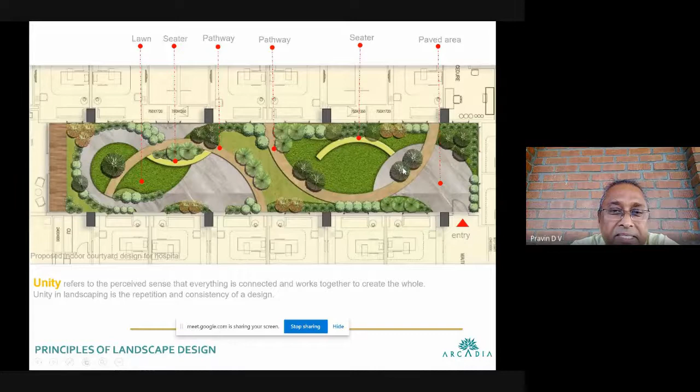This is one of our projects, which I'll discuss a little later.

Here we're talking about balance when you're doing a design, how you do an axis, keep all your vistas, planar vistas, see your building structure and what are the views from inside and outside, then create your whole system based on that.

So this is how we did one. We did this axis line when we come in, and then a little balance here. You have this circle, then this, and they both blend into each other in some aspects, with a few elements thrown in to compose the whole thing.

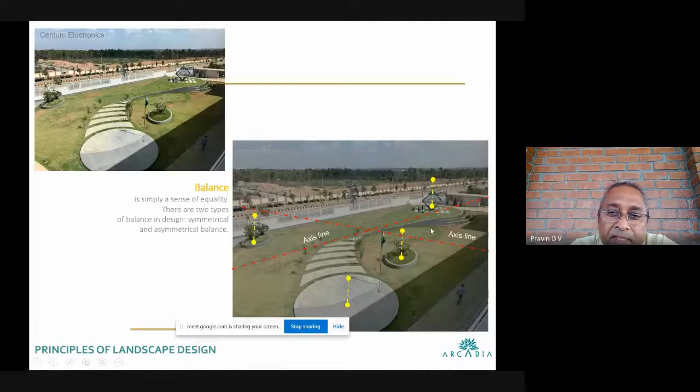So these are all the basic design fundamentals, which I'm just going through once, then we'll get into the details. This one is all about proportion, like in terms of scale, the heights of these little kerbs, the height of these walls. The idea is to keep everything nice and cozy, depending on the scale.

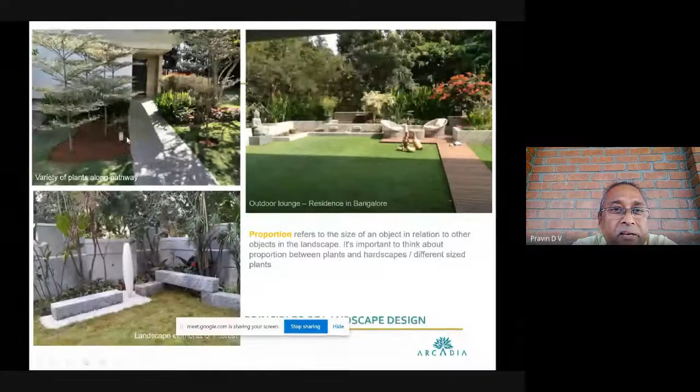Even here, for example, for this axis we have low trees, and being the pathway narrow, the trees are planted accordingly in a low scale. Whereas here you see these are much bigger. This is actually on the first floor, a created garden on a portico, which is the same level as the living room of the house.

And these are some more experiments which we have done using stone as seaters and all that. The whole idea is to get these proportions right. For example, here we have given this height, around 18 inches, whereas this is much lower, so kids can sit, even elders can sit. That was the idea of doing this in different levels.

So I'll go to one of these projects, which is a huge site, around 6 acres with one house in the middle. Then they have this pool. The idea was that you enter, walk into your living room, and when you sit there you can look across the pool into this space, which is actually a gazebo, and then onto a green wall. Apart from all the green, there's some more green here as a backdrop for this structure.

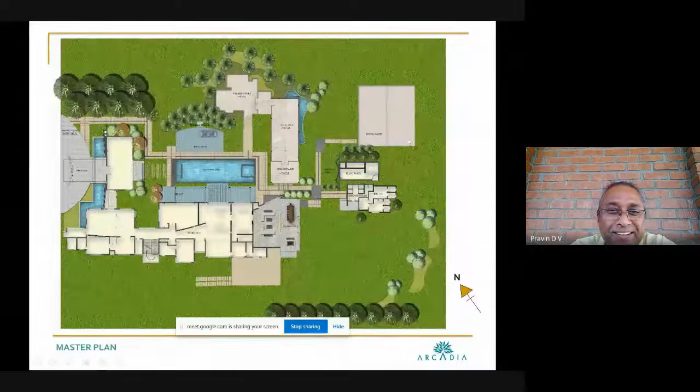So this is how we worked this whole plan out, I'll show you how it looks. When we first got into this place, this was what was there, we had this little gazebo. This view is from the living room, when you come in and look out over the pool, you see this gazebo.

Then we changed it to this. We did something more modern here, the pool remains the same, and then we put this structure here. It's like a gazebo which extends into this, what we call the party hall for a minute. And then this wall here, I'll show you some more pictures.

We have a greenhouse. Similarly, on the house, the facade was quite blank, so we added these structures, landscape elements, to make the whole space nice. The idea was that from inside, when you step out, you have some shade, some open space, some plants, and the whole space overlooks the pool.

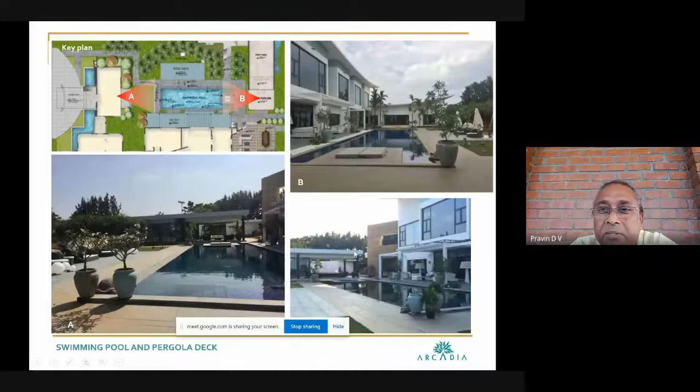We walk in here, step out, and then we see the whole pool and the gazebo here. So now you see here, this is the green wall which we have done, and this is the party hall with that gazebo-ish roof, after it's all done up. Similarly here you can see the structure. The idea was that this whole thing blends together into a nice space.

When you come out from this party hall, these are the steps to come to a sunken court. The idea was that the landscape is higher and you are at a little sunken level, so when you sit, you actually feel like you're sitting in the middle of a green. This is just behind, the sunken court.

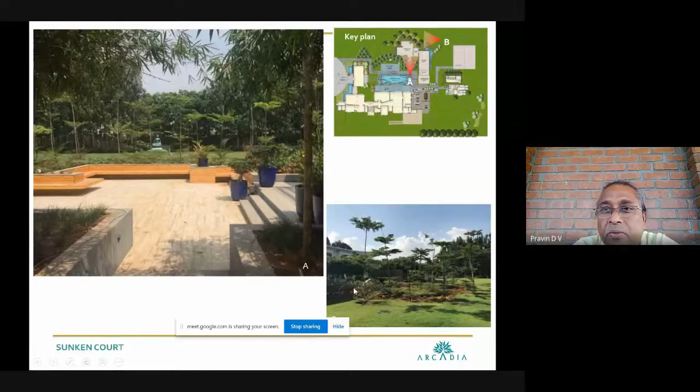The idea is when you sit, you have all these plants literally falling over, so it gives you a nice feel when you're sitting there. And then, being Bangalore, we put this little fireplace outside, so when December and all the parties are happening, this is a nice space to hang out.

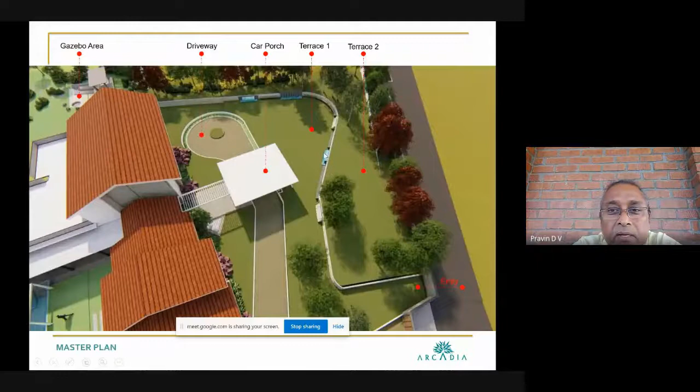I was talking about this retaining wall. A lot of engineering goes in terms of the volume of water coming in here and stagnating below, putting pressure on this wall. The wall could fall, so there's some engineering involved where we have this large foundation retaining wall, which is tapered because we wanted to put in a seater here.

And then we created little slits here. Apart from that, we use something called a drain cell, which takes the pressure of the soil off the retaining wall. The idea is the water pressure continuously on this is not a good idea, so we let the water drain out through this gap, collect into a pipe and out again.

These are the overall levels for how we did this. This is a driveway level - we have the first level, then the second level, then the third level. That's how we reach the 18 feet, creating these large open spaces in front of the house.

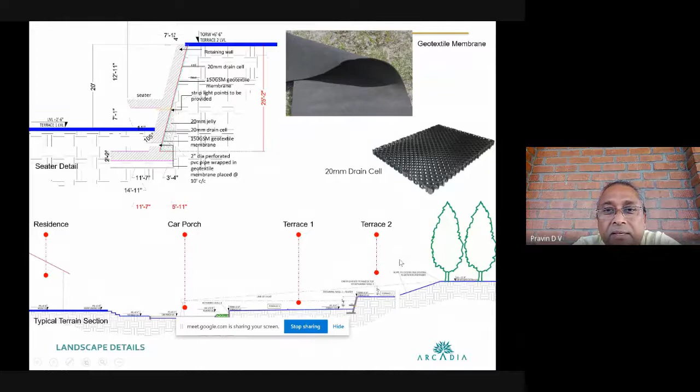Yeah, this is how it is - we come down, then flat, and then again the larger part. This is how we're detailing this space out. So these are all work in progress, kind of drawings we do to sell this concept to the client first.

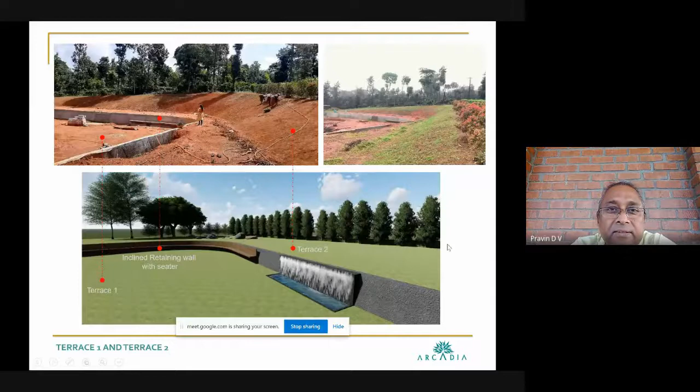So this curved retaining wall is in RCC. Here you can see the height, it's quite steep. This itself is 5 feet, so you can imagine how much this is.

So the idea is, at some point we do the seaters - this is how we had planned it. That's why you're given that incline in this wall, to have the seater.

So these are some images of the driveway and things like that. So here the idea is, when we work on the landscape, we start - whatever is outside the house is a part of the landscape. So we talk about what you are going to see, what kind of views we are going to create. Apart from that, when we drive in, what is the experience which you want to create?

Start from there, and then we come back to the material - what kind of material, what is this material, the whole thing. And then again we try to tie it up with the building material. If you have some cladding on the walls, try to tie that up with this material, so it kind of blends in. Otherwise you have this completely contrasting element, which is also nice depending on the scenario.

So this is how we've done the entrance. What is interesting is from this point to this point is almost 18 feet again. So we said let's do this whole thing in wooden strips like this, which have got little levels in them where we can put in the lights, and the top is glass.

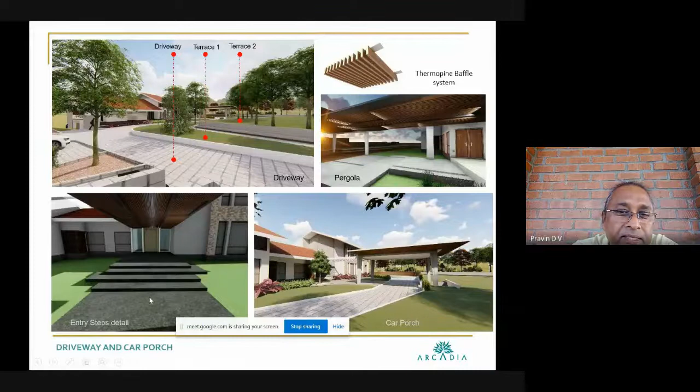Now we're going to create another deck here. And then these trees, what we had planted earlier, we are using it, like you can see it here. We can put a large gazebo here, so this becomes like a pool bar come seating area. Then you have these trees going through the roof, so we work the roof around the trees here.

And this is like an overflow pool - it's, what do you call it, an infinite edge pool. That's what we call it. So this is how it's detailed out.

You have the pool deck level here, then the water level at the same level, and then here there's a drain which goes down, which you don't get to see when you're standing here. That's how these infinite edge pools are designed. You can see them here.

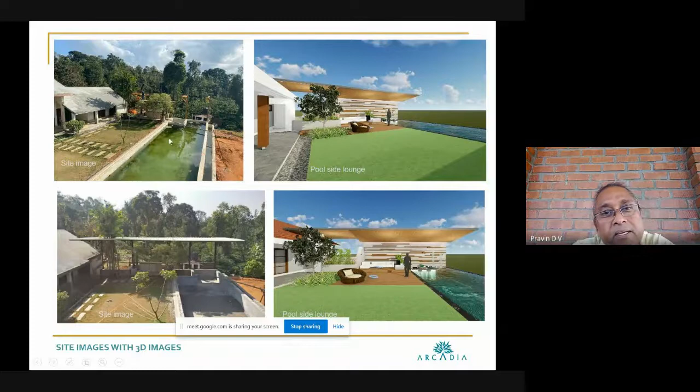Yeah, the same shots from another angle. So this is the pool bar with some waterfall, some wooden underdeck ceiling. This is how the structure was done last month.

This is also another large area. Like when you enter from the main door, you come in here, and this is like a massive space, which is like the den, which again overlooks the pool and things like that.

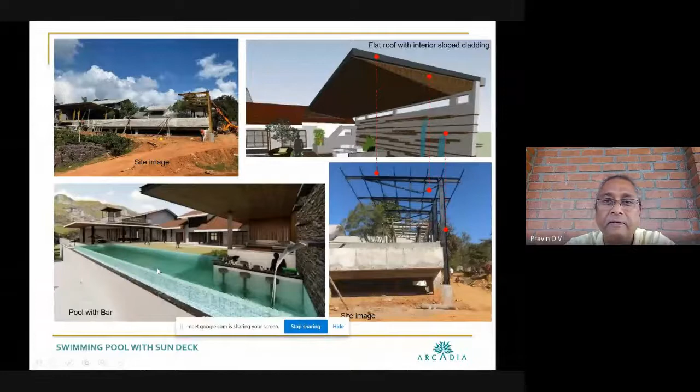So now that we have these huge spaces, we decided let's do something interesting on top. So here we have these levels, they're all done in wood. The idea is that you sit here, and then from there you can still overlook onto the pool here.

Apart from that, the view is fabulous. So we created the best in terms of creating these seaters here. And this is a master bedroom here.

So you step out here, and then you have these seaters at different levels, plants. And then this whole thing is a glass railing - the idea was you get to see the max amount of visibility in the estate.

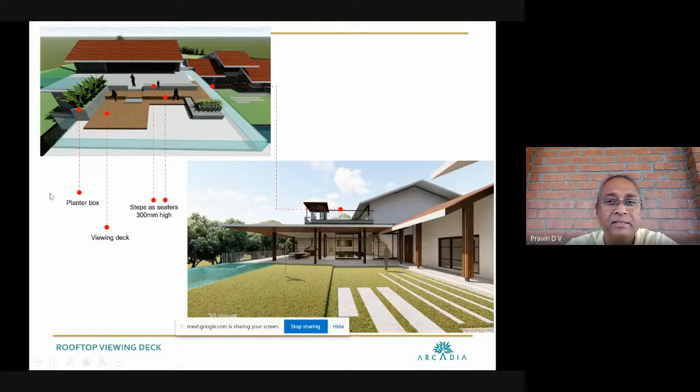This is the other angle.

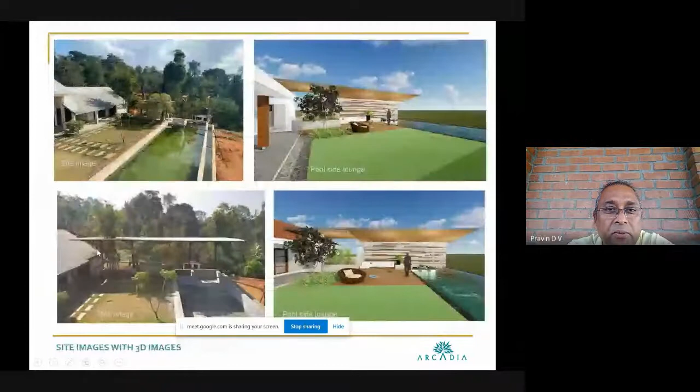Our landscape design starts from the gate, and then you plan out: if you have a visitor, what are they going to do? They get off here, go and park, then come into the house, enter the house, then the bedrooms are here, etc.

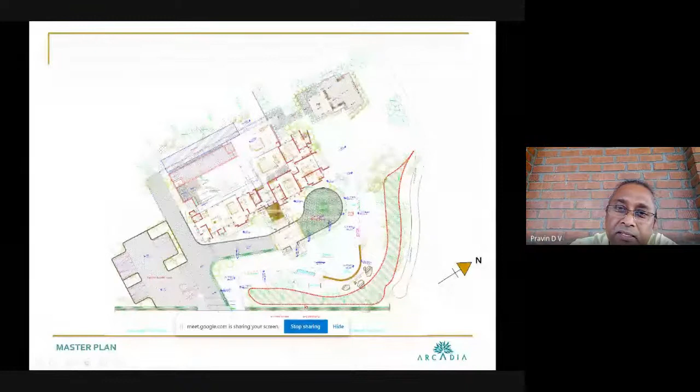So the hangout spaces - this is the den we were talking about. This is the living room, and this is the den, which is a bar, seaters and all, overlooking into the estate here.

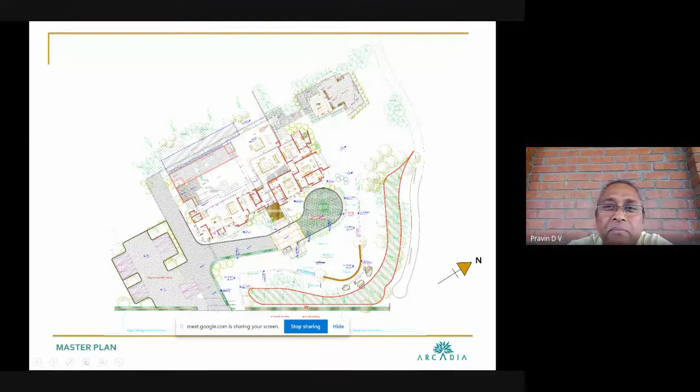From here we have steps going down into this little gazebo, a yoga deck we call it, and a movie theater is what we're thinking of, an outdoor movie theater. There's something we thought would be interesting in that space - I'll show you how it works.

From the house you come out here - this is the yoga deck. Then you come down here, and this is again a sunken seater, very similar to the first project I had shown you. You can see it here - you come out from the house, and then you have this yoga deck, sunken seater.

The idea was to do a movie setup that would be fabulous when you're out in the open at night under dark skies, with a screen where you could watch something nice. This is the screen how we proposed it - the projector is here, which throws the image here, and the speakers are behind. That's how we looked at it.

This becomes a seating place - you can add in some more chairs, and this is a little fireplace here. That's how we did this. The roof has got an interesting wooden profile shape and all that.

This roof - what we're thinking of doing is not using RCC, because we wanted a flat roof, since the whole house has got too many slopes already. So we thought, let's do a flat roof.

When you do a flat roof, the simplest material is RCC, but we decided let's do it in granite instead. We'll take these huge chunky slabs and fix them on top, creating this whole flat roof in granite - zero maintenance, and it looks more natural.

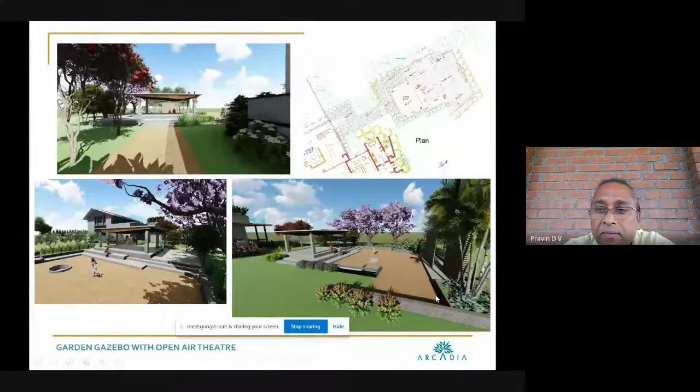Just to show you the detail - since the smaller the site, the more challenging it gets, because we try to make it look more interesting, and you have to consider each experience. The moment you open the gate, this should look good. So this is what we did.

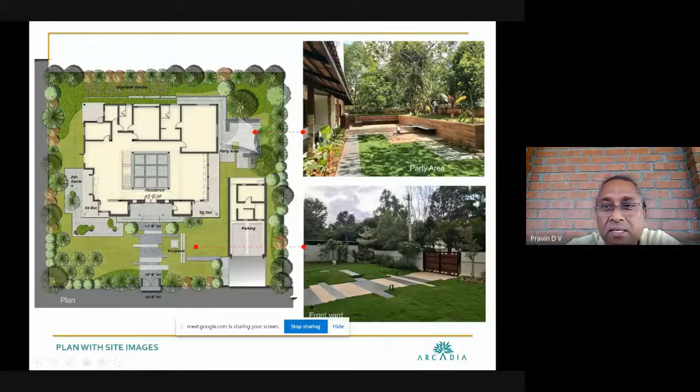This pathway holds the plants on one side and the plant and lawn on the other side. Here also this level was much higher, so we created this little space with seaters. So when you step out here, this is a nice cozy space where the trees are tall - it's a more overwhelming space, feeling like a nice sunken low seating area.

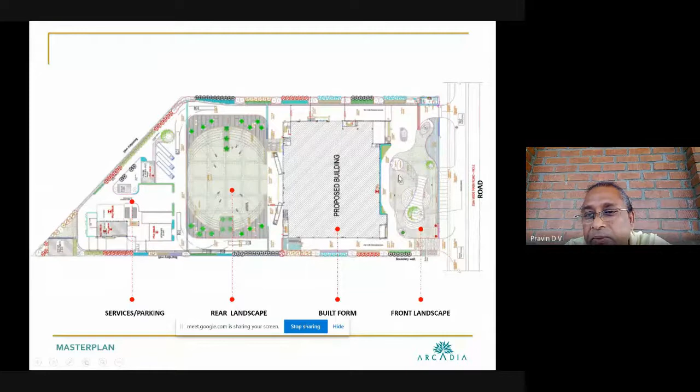So we gave them two proposals. One was - this is the drive-in and this is the exit - and then we did this water body, at the same level as the grass, with a little bit of an abstract element.

And we liked this design, and we said, let's do it. And then the client said no. They wanted one more option. Then we came up with this, wherein we drive in and we drive out.

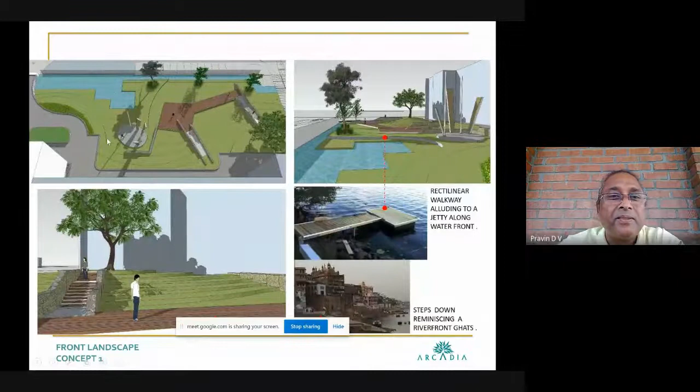So this is very different from a normal design, this is very linear and angular, and this is interesting, no doubt. But this is something offbeat, the whole space. Like you have this huge curved retaining wall, almost 8-10 feet high from the ground, and then the stepped seaters here.

So the idea is when you walk in, you see this water, you see this mound. Beyond that, this is a flagpole area, and this whole thing leads to - we had initially thought of putting something like a monumental scale kind of a large thing here, some abstract art. Then they said, let's put a tree, like a Bodhi tree.

We ended up doing completely different. Like this is how we had looked at it. We have this whole space going up, and then you have a nice focal interest here, then the slope down on either side, so that when you stand here, the landscape reads like that, all in one line, on a tapered line rather. So you have a tapered land here, whereas the view is tapered here. You can see from here.

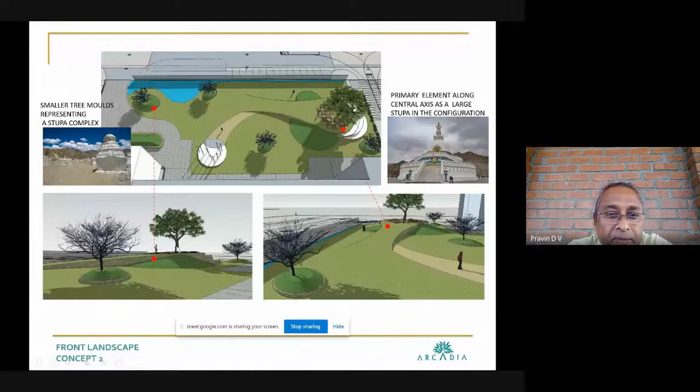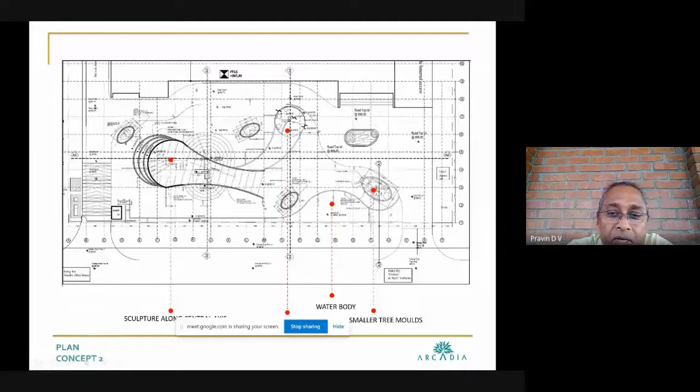So this is how it looks. So finally, we ended up putting a nice sculpture here in that space instead of a tree. We decided let's put all the trees on the sides and make this into an interesting space, and then let's put a nice big one - this is almost 20 feet high, 20 by 20.

It's a cube. Yeah, you can see from here. You can see from here. And this is that flag post area, which is this one.

So these guys have a lot of international clients, so they wanted to put all these flags whenever there's a seminar or whatever they have. So when these visitors come in, they put their flags here. So this is what we had planned here, around 5 flags.

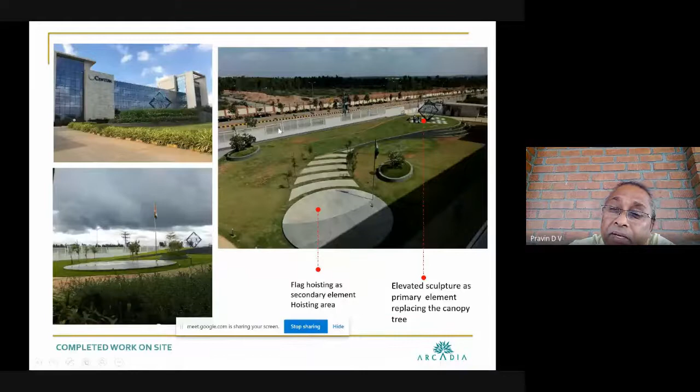This is a road with that fence. So for the fence also, we tried something different - we used something called an expanded metal mesh for the walls. Instead of having solid walls, we did this porous wall, so we can look into the landscape rather than block it out completely.

Yeah, so this is how it looks when you drive in through the main gate. You have this little water body, then from here you can see this, which is a focal point of interest. And this is the area where we have the flagpole. So the idea was that people drive in here, finish the thing, and then get into the building.

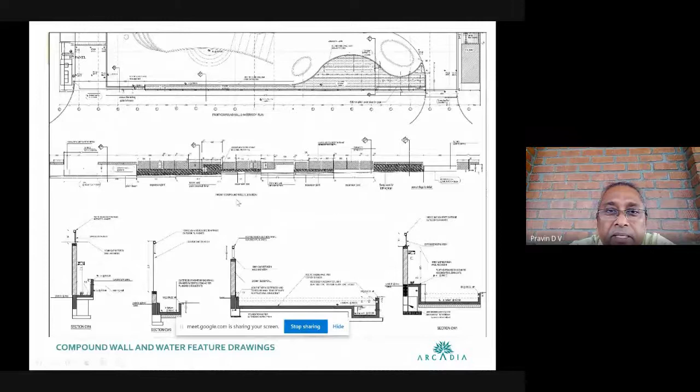So these are some details of how we did the structure. In landscape, we get into a lot of drawings - so these are these water bodies. And then we need to work out the details of the volume of water, how do we filter it and put it back - all the engineering has to be done, then the requirement of water for the landscape. So this is the profile of the water body.